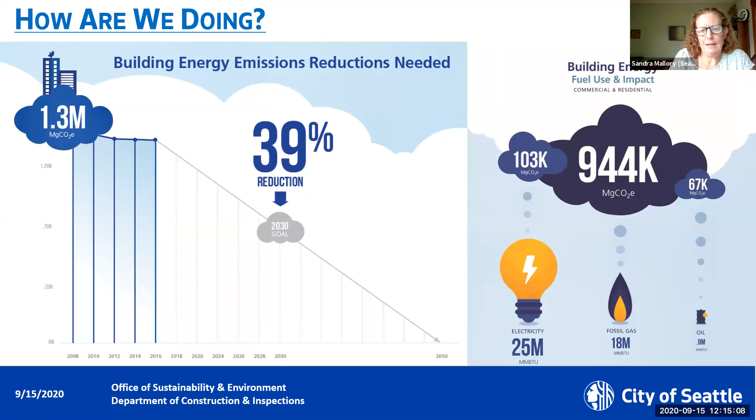I put this up here to highlight that policies are coming to address existing buildings, and so whatever you build now is going to have to accommodate that change. It's really important to think about how these buildings are going to act in the future. So I'll turn it over to Duane to tell you how to build them now so that you're set and ready.

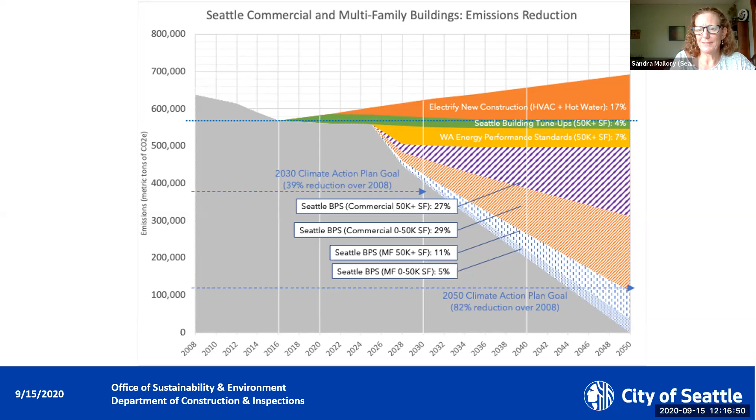All right, so here we go. In case you haven't met me, my job description is to try to move the energy efficiency and carbon emissions of buildings in the right direction, aggressively. This tends to make me rather unpopular, but I get to be the face of this.

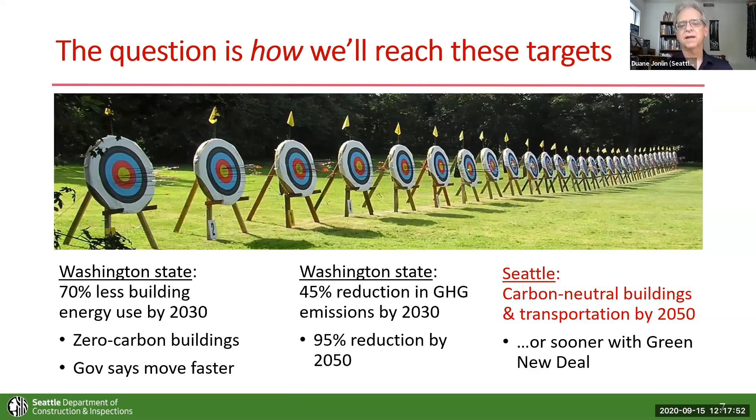We have set these goals at the state level in Seattle, and as you saw from Sandra's slides, more aggressive policies may be coming soon. Unlike most of the rest of the country, where they're always haggling about whether we should do any of this or not, we're haggling about: okay, we're doing this, what's the smartest and most sensible way to get there?

For this round of code changes for Seattle, we had 4 basic principles we were working from, that everything from now on should be built off of these 4. The first one, which you people are already really good at, is to do a really good envelope, because those are building energy savings that are real and very long lasting. Nobody's going to rebuild their building envelope as long as any of us on this call are alive, because we're doing a good job of it now and it would be really uneconomical. So we've got to build it very well—it's going to be there for a long time.

The second one is we can't be putting in fossil fuel equipment now and expect to be carbon neutral in 10 years or in 30 years. Once you put in a system, you've probably noticed that even as the equipment gets replaced, the system stays the same for a long time.

The third one is then: okay, if we stop putting gas appliances in buildings, we can't just do everything electric resistance, because we have a limited amount of clean electricity, and we're going to start using it to transform all the existing gas heating and water heating to electric, to heat pump, and our transportation as well. So we've got a lot of demands on our clean hydro and whatever renewables we can get.

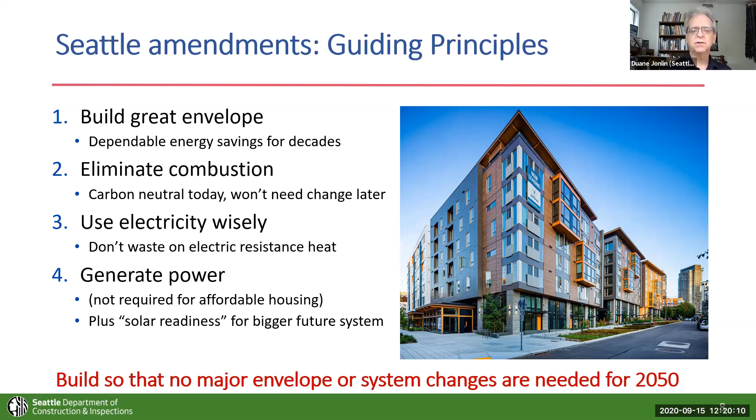But solar is something you could do later. It's almost the only thing you could do later without having to backtrack and rip stuff out.

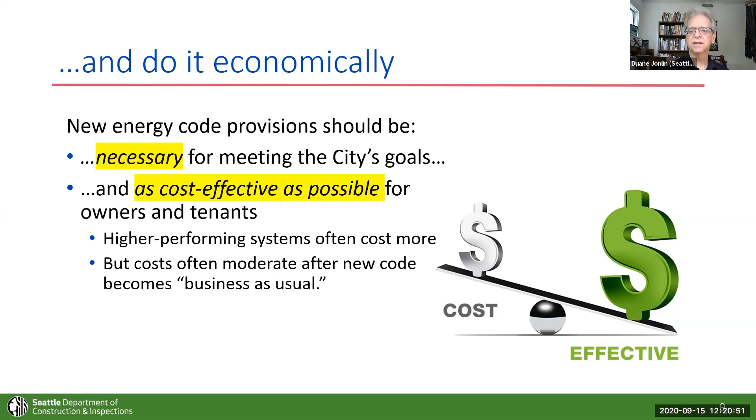Everything we're doing has to be necessary for getting to this target, and it has to be as cost effective as we can get. See the last bullet point there? What we've discovered through many code cycles is that things that are expensive while they're still only being used for LEED platinum projects or some other highfalutin thing, they're special order, one-off, high-risk things. Those cost more, but those costs come down once everybody's building to a different standard. We have lots of examples of that.

Finally, as a preliminary thing, we look to the big chunks of energy use. For residential, obviously space heating and water heating are the big chunks. So we can do stuff with some of the smaller chunks, but we want to keep our attention where we can make the most gains.

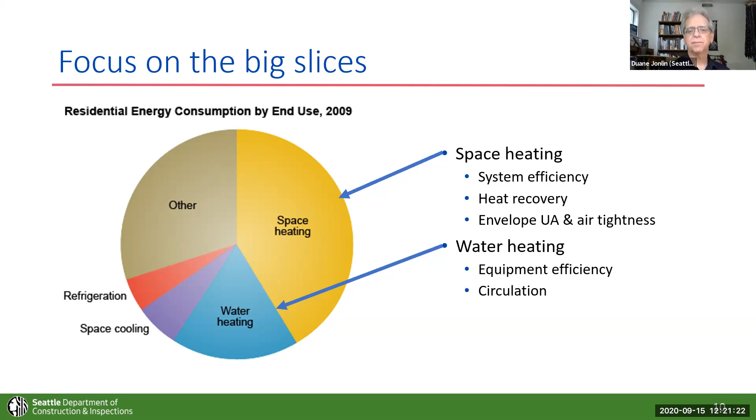So now I'll rattle through some things. I've tried to identify in the slides where things are statewide that are changing you might want to be aware of, and where it's Seattle specific.

The air barrier test rule up till now has been: you got to do the test, you got to report the results, but you don't actually have to pass. Well, now you got to pass. We've lowered the test standard down to 0.25 leakage, but the pass standard stays at 0.4.

The people that have hired envelope consultants never have a problem passing this test, but some of the other people, especially further away from King County, have had a rough time of it.

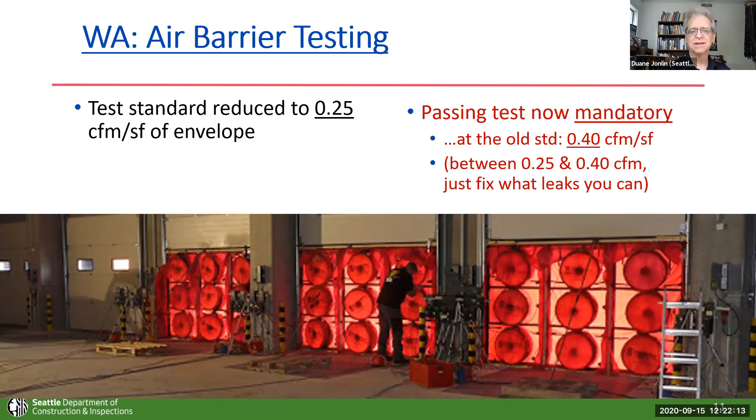Also, we've changed how much glass can go onto things. Once again, this is not a big deal for affordable housing, where you tend to have very reasonable levels of glass, but in the private sector, especially high-rise people, it's a really big deal.

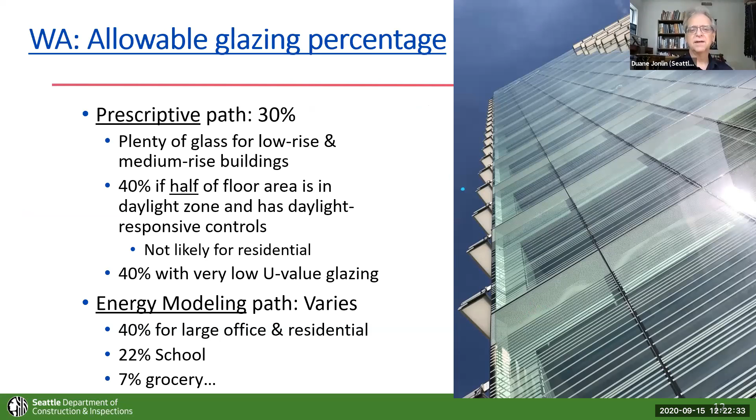Now, here's one where it's different. We've changed the way we're regulating glazing from our old system, which used to be metal versus non-metal. Now for all the punched openings, which is typically how affordable housing is built, not with curtain wall or other things, you see it in red at the bottom there. 0.26 is going to be our new standard.

That still allows for a number of products that are double glazed. We're not into the triple glazed category yet. And based on a phone call from somebody on this call who said, we really like operable windows in affordable housing, but you can't really do the 0.26, we have a slightly more relaxed standard for your operable sections.

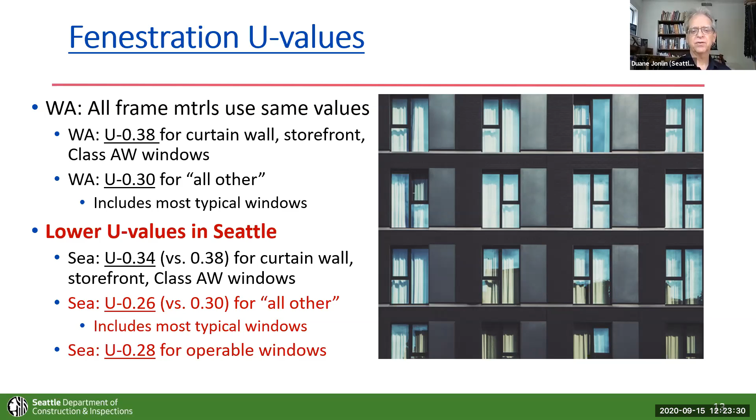By the way, having all this technical content to cover, I'm sort of rattling along like an auctioneer, but you can always stop me to back up and explain something, because if one of you has a question, probably everybody does.

We have some rules in that I won't go into too much depth on, but now you've got to pay attention to anybody that's got cantilevered concrete balconies. That's just been a huge heat leak, and so we have some control over it now.

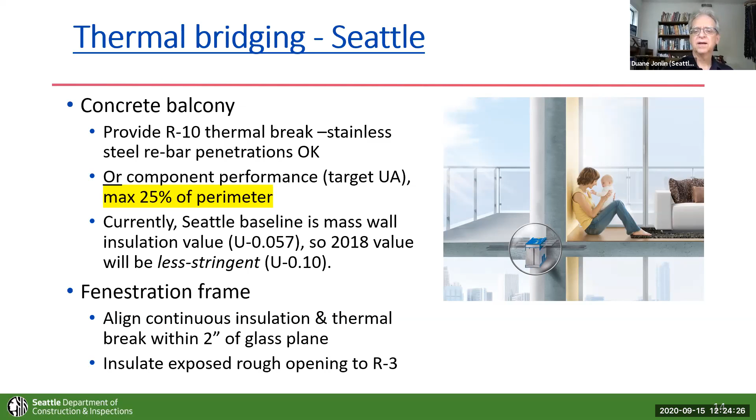Also, a problem that's not typically an issue with affordable housing: your glass has to line up with your insulation, or be close to it, so that we don't have a big thermal leak around the perimeter there.

Here's something that's just Seattle, and I brought this over from the New York City Code. PTACs and PTHPs have been used for budget motels for a long time because they're real cheap, and to service them you can just yank out the entire unit and push in a new one.

But at least now we're going to insist that people recognize that, as opposed to the standard for a typical wall assembly, which has a U value of 0.05 something, this is 10 times that amount of heat loss, and you'll have to calculate that into your wall assembly U values if you're going to go for these things, because they're about 4 or 5 square feet.

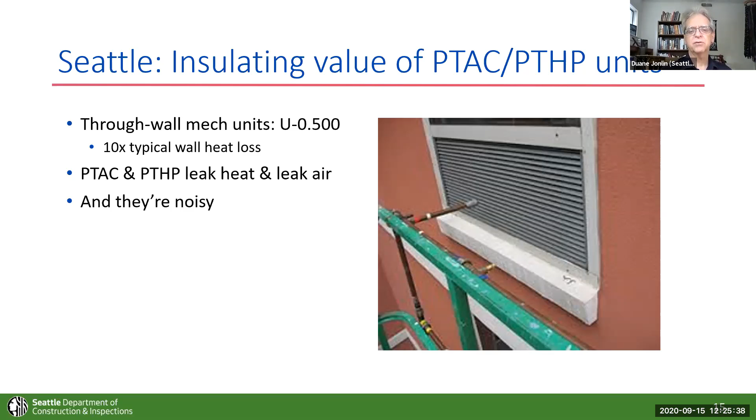Yeah, about 5 square feet of this very, very poorly insulated thing and a lot of air leakage. And they make so much racket. Not sure if anybody has been using them, but we'll make those go away.

Here's something happening at the state level: the state is requiring this total system performance ratio, which is just a backstop measure that ensures the HVAC system you're using has about the same level of efficiency on an annual basis as what's been selected as a pretty good system for that building type.

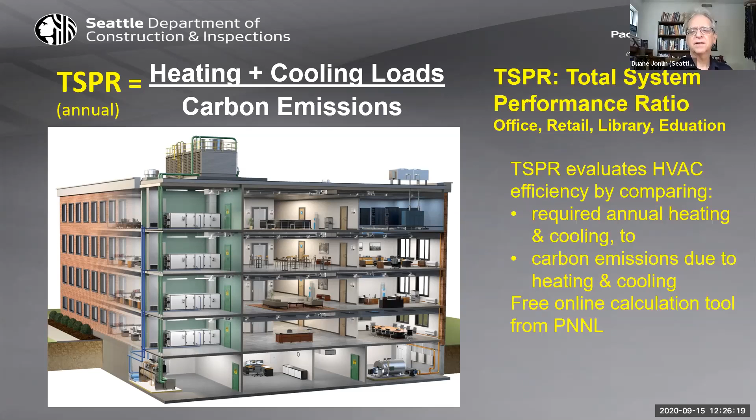You see on the top right there that it's office, retail, library, etc. In Seattle, we've added multifamily, and this TSPR - we could have a whole separate session on this sometime, and I can actually get the authors of this in the virtual room with us. There is free software available online at PNNL that they've developed for this, with funding from NEEA and Seattle City Light, and I think OSE contributed too, so we got a module for multifamily as well.

So we have a standard for efficiency of heating. Once again, this probably isn't going to change any of your design. It probably will impact high-rise market rate housing a lot.

Just be aware that this is there, and anybody who would like to fool around with this software - they've just completed and posted online the multifamily part of it. Contact me directly and I can get you that link. They would love to have some of you run through this and give them feedback on anything they could do to make it more user-friendly.

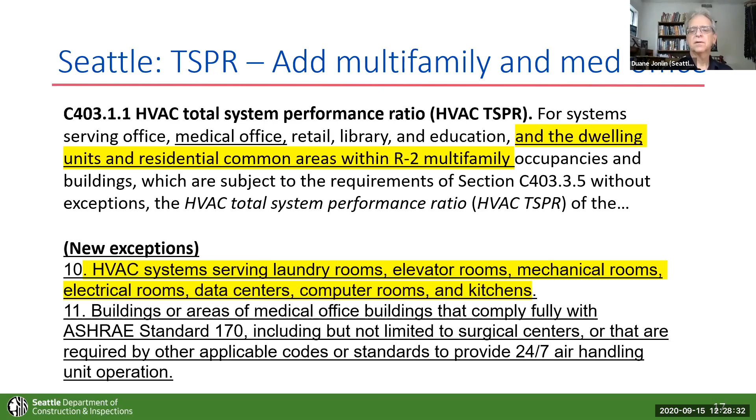So this is something that's not Seattle - it's Washington State, and you've probably all been hearing about it already. I just wanted to make sure we got a slide up to recognize that just doing trickle vents and bathroom exhaust - a lot of studies showed that it really wasn't ventilating dwelling units well at all, especially the upper floor units. The trickle vents often ended up being used to flow air out that had come in from the corridors.

In this case, you've got to deliver ventilation air to each space, and it's got to have heat recovery from that air.

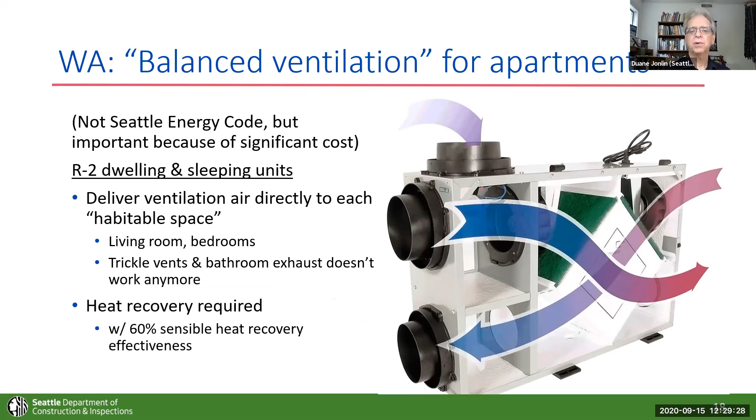Talking to various engineers in town here, you could use those little units like you see on that slide for each apartment - some people are going to do that. You could have rooftop units with shafts down to each unit. Remember the quantity of air is not very large, so these are small shafts. But with the vertical approach, you end up with some fire damper issues and having to have a shaft that takes up area you'd like to use for your tenants.

My favorite looks like it's going to be doing floor-by-floor units - maybe at each end of the corridor you can have a unit, and some people like to run it right above the line of bathrooms rather than down the corridor and through those fire rated walls. But there are several ways to do that, and everything we're doing now should take into account that this is now required.

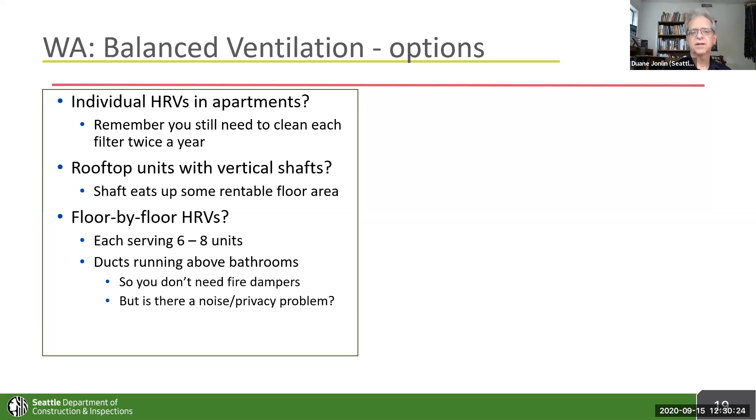So for Seattle, there are 3 big deals that I'm going to mention here, and this is big deal number 1: you've got to not use electric resistance or fossil fuel for space heating. So that means heat pump systems.

And then I've got some exceptions, because it doesn't make sense to use a heat pump for a really, really low load. So I started out with 250 watts, then went up to 500 watts per apartment, then went to 500 watts per room, and then got nudged by another person on this call who said if you could go from 500 up to 600, I could do my corner units as well under that limit. I said okay, 600 sounds good.

It may turn out that with larger units, especially say the one that's on the top floor in the corner with roof exposure and 2 exterior walls, you need to go with a heat pump for that, but it would be a limited number of those apartments.

The rules do allow that when it gets down to really cold temperature, and based on the type of system you're installing, it's either 40 degrees or 32 degrees, you can start having electric resistance heat kick in. But it's not the kind where it just suddenly switches over entirely to auxiliary like a lot of PTACs do - instead it just phases the extra heat in as you need more of it. We don't get very many cold days, but we want to make sure everybody stays warm on those extremely cold days when they do happen.

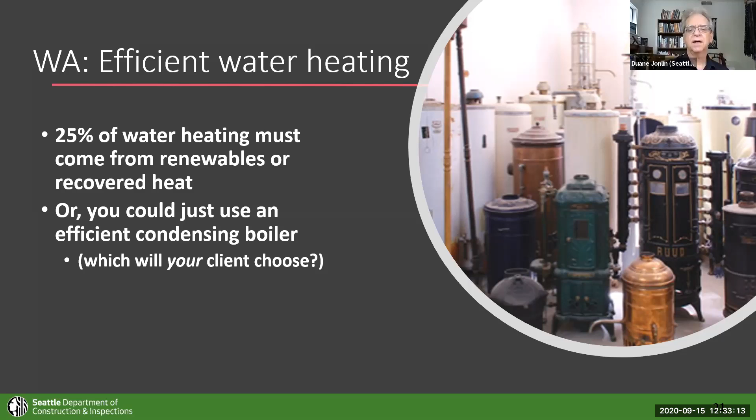Inside of Seattle, and this is big deal number 2, central water heating systems starting at the beginning of 2022 - so you got an extra year to get ready for this - that ends up being heat pump system with substantial storage tank, because the heat pump doesn't heat the water as quickly as gas or electric resistance boilers do.

So it's a challenge going forward, and various people have stepped up to say they're going to help. NEEA is planning on providing technical assistance and guidance there, and they have a whole high performance heating section that they've been working on, that they're going to get into these multifamily units, and City Light's probably going to be offering training and support as well.

So from now, we got like 16 months until we got to be ready to at least have designs that are ready for that. And then a few years from now, as we start installing these systems, we'll have to have all the plumbers and installers up to snuff. So this is big deal number 2.

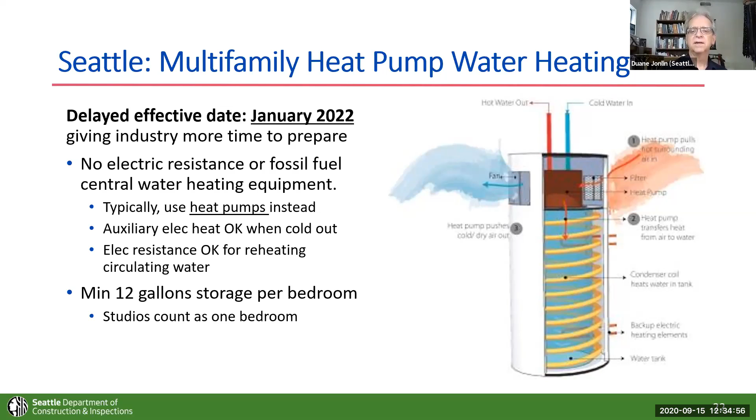And remember, this is all for things that are 4 stories and taller, but in Seattle proper, that's pretty much everything now. You would have to separately meter your gas, same as you do for hot water and for electricity, for each unit - you have a separate gas meter. There are little ones that fit in a wall for 3/4 inch piping, but that could be used for billing purposes or not. It would be up to the organization that owned it.

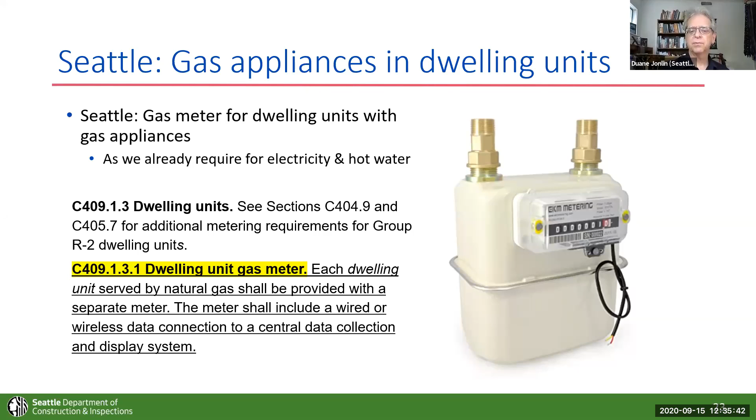Lighting power allowance is not an issue for dwelling units, because they have their own separate rule. But for all those other spaces you have in your building, at the state level, lighting levels have come down 11%, and that brings it down to just about exactly where Seattle's current lighting power allowance is, and then Seattle's going 10% lower than that.

Talking with our electrical people that do plan review, this is never a problem - it's really easy to meet these targets, but we want to make sure that the targets are something like realistic.

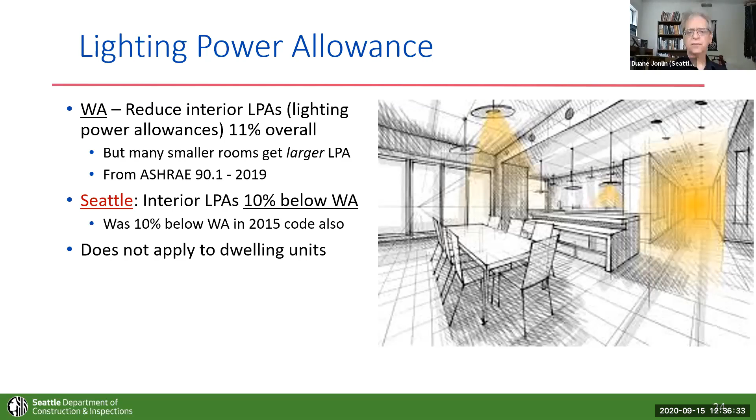So here's - I somehow lost my slide. Let's look at C406. This is the section that says a building has to have a few above-code measures built into it, and at the state level, you have to get 6 points on this scorecard, and in Seattle you'll have to get 8.

I had initially proposed 10, but I kind of got talked back off that ledge, and so we've done a couple of changes to that, Seattle.

Remember, we just had a slide a minute ago that said you've got to use high efficiency water heating - so that's already in the code baseline. So that number 8 goes away in 2022 as an option.

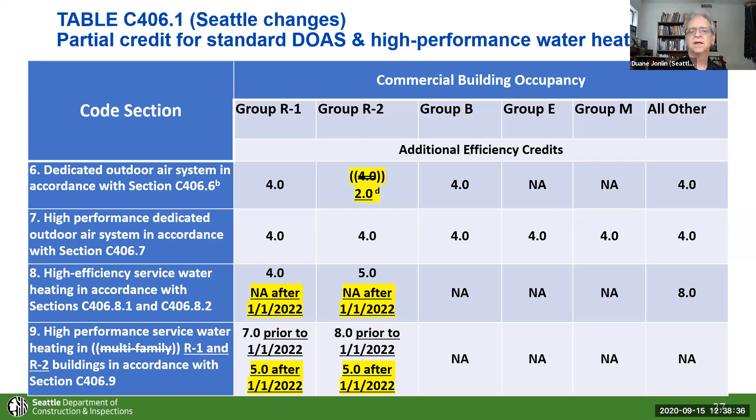Here's an engineer looked at the state code - this is a friend of mine from FSI Engineers - and sort of marked out which of the options made the most economic sense in his view for the different building types.

So you see the 2 columns that I have circled in red there. That's your R2 multifamily. The squares filled in with green are the ones he felt were a slam dunk, that you got a lot for your money. The ones filled in with orange are sort of second best - they also penciled out, but just not as well as the ones in green. Then there are a few he didn't color at all, meaning that'd be really expensive.

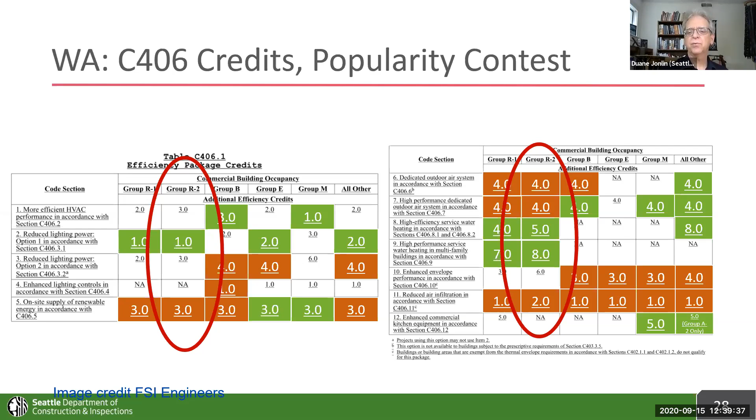Somebody's taking a look at this - your mileage may vary - and you notice on the chart on the right that 8-credit thing has become 5 credits in the new table. So just taking a shot at it based on his ratings, say you take the lighting one, that's almost a gimme, and the advanced water heater, that gets you up to 6 credits. To get to Seattle's 8 credits, do the reduced air leakage, but you might pick one of those other items in the second best column. Notice the rooftop solar one is 3 credits maximum, but you can get that one credit at a time, so you could just do 2 credits that way.

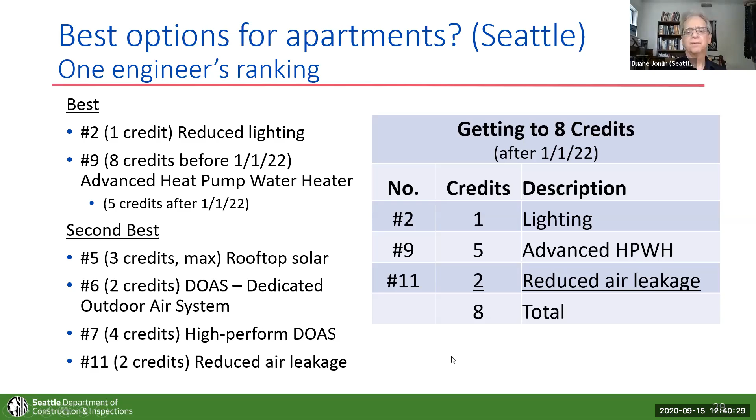So I'm going to talk about energy modeling for a bit. I'm not sure - maybe somebody on the call could unmute for a second and tell me, how common is it for affordable housing projects to do energy models for their projects? Can somebody fill me in there?

Maybe not. David, do you want to weigh in on this? I've not been involved in one, but we're starting to look at it more to provide more design flexibility. I don't know, I haven't looked at it under the 2018 code at all.

Yes, we typically see energy modeling used for all the high-rise projects in town and for complicated buildings like labs and hospitals, but more basic buildings don't use it. But we'll run through this anyway, because it's probably at least important for you to understand that we've entirely thrown out the energy modeling pathway we've used for all these years and replaced it with a new one.

It's from ASHRAE, with the poetic title of Appendix G. And we've switched from measuring the energy used on the site to measuring the carbon emissions.

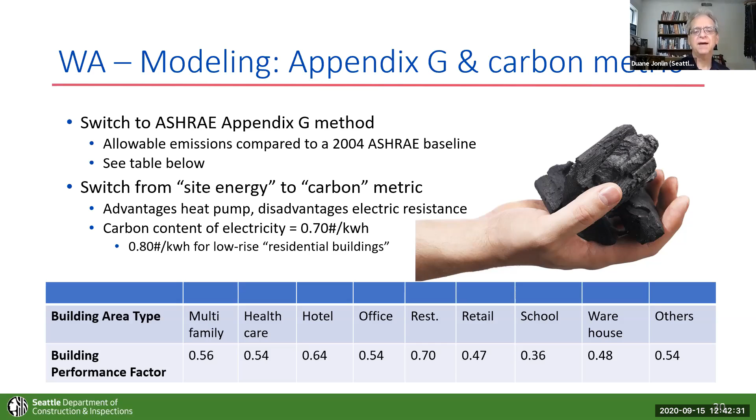So what you see there is at the state code, if you look at the row of numbers on the bottom, that's the percentage of a baseline that was, for odd reasons, tagged to the 2004 version of ASHRAE 90.1. So if you look on the left where the multifamily is, you can have 56% as much emissions as you would under that old code. Now in Seattle, because of all these other things I've told you, we have a more stringent code.

So to make the Seattle energy modeling match the prescriptive path stringency, we just took 10% off of each one of those. It's not exact, but it's pretty close to the difference overall. So for multifamily, instead of 56% as much carbon emissions as that old ASHRAE, you could use 50.

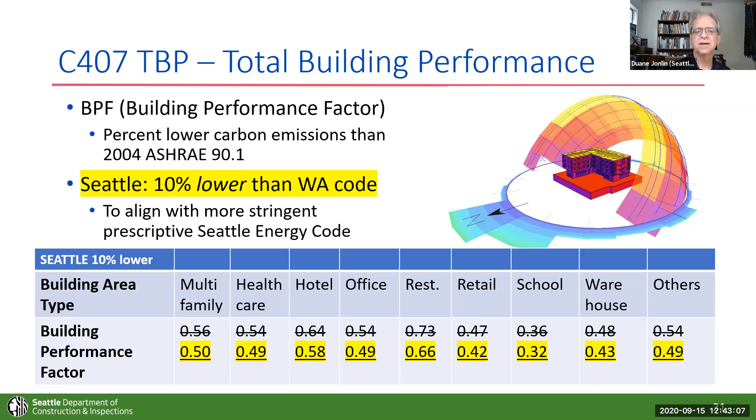And then we also have this target performance path, which I don't think any of you has ever used, but there's another option - if you want your building evaluated by how much energy it really uses and be willing to put some money there to guarantee that, you can have 12% higher than Seattle would normally allow.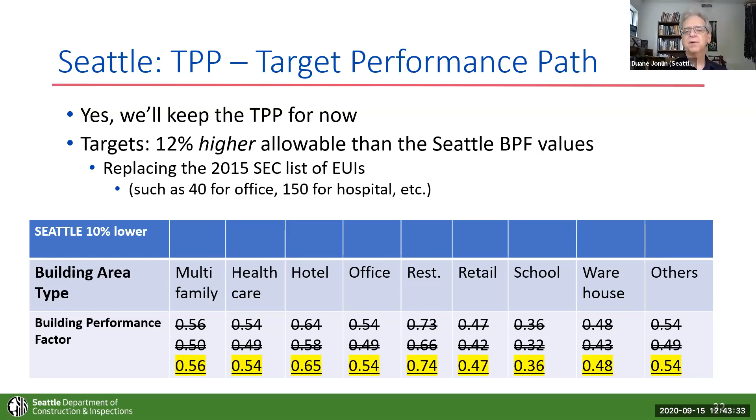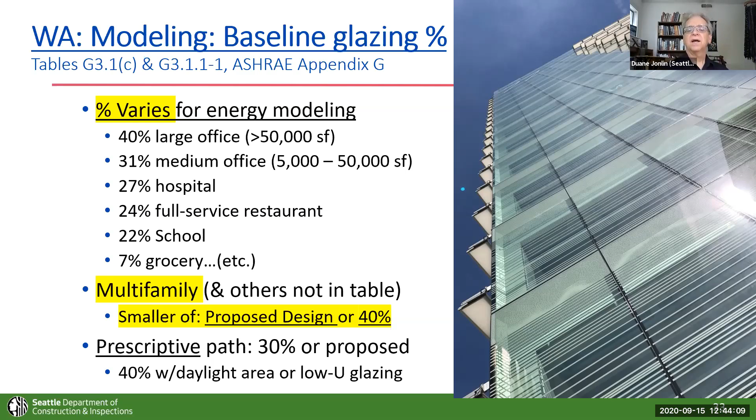This is big deal number 3 for anybody who uses energy modeling. Since energy modeling has typically been used to degrade the building envelope, I've been saying now that in this proposed new Seattle code, you can't make the building envelope any worse than the prescriptive code allows by doing energy modeling. You've got to at least keep that, because remember at the very top of this presentation, idea number 1 was that we've got to build envelopes that will stand the test of time and get us where we need to be in 2050.

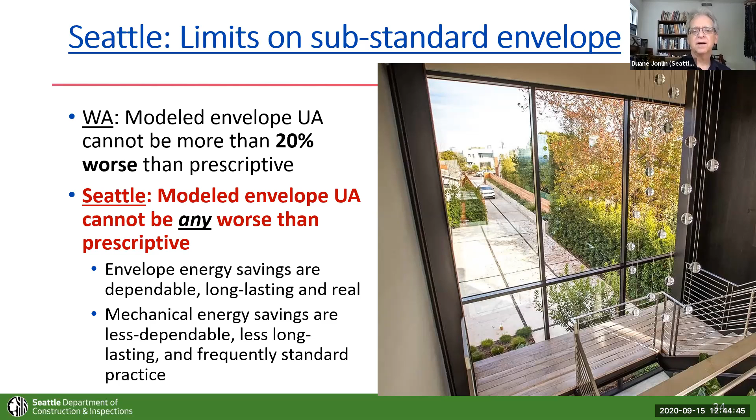There's a larger requirement now for buildings, including multifamily, to do this, but I've exempted affordable housing units and affordable housing projects from the renewables requirement. For those in market rate housing or other commercial buildings that are required to do this renewable energy, I've set up options where they can donate or gift a system over to an affordable housing project in Seattle or to a state agency that has a solar program set up.

Thus they can get out of having to do it, or part of it, on their own roof. So you might have somebody calling you up and saying, hey, do you want a free PV system on your roof? And I think the answer is yes, we want the free PV system. The way I've set it up in the rule for that gifting is that it would have to be complete and functioning on the site that they sent it to in order to get this credit.

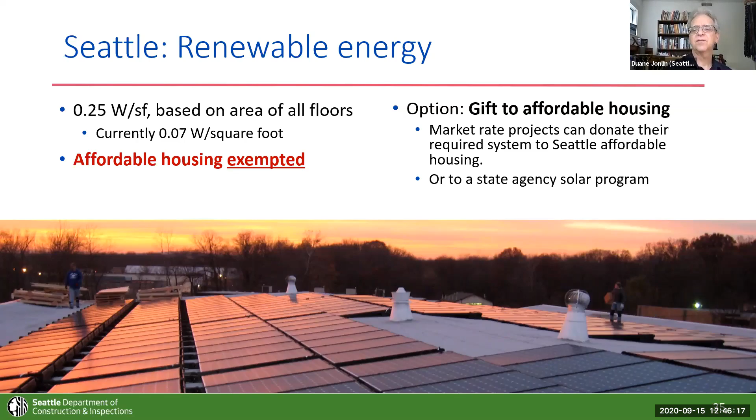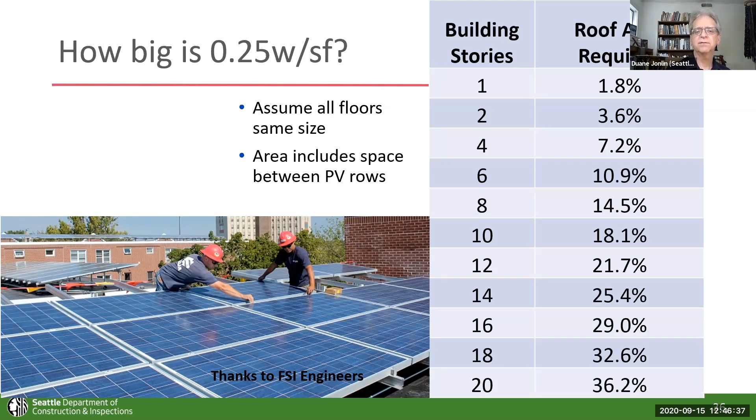So that's it. I know that a lot of this sounds challenging, but I wanted to end by saying that we have buildings up around town that already meet these requirements and exceed them. They're doing better than that, for reasons of their own, at market rate and in affordable housing have gone beyond. And you in the exemplary buildings program are familiar with this fact.

Yes, it is possible already, and we can get there, and you'll be leading the way for a lot of other people that are looking to you, because you and the Exemplary Buildings program have already solved a lot of these problems. You've looked at envelope. I know we're going to be looking at water heating coming up, and you've looked at mechanical systems. So if anybody's on top of it, it's probably the people on this call.

And with that, I'll turn it over to Marty. You want to be the MC here?

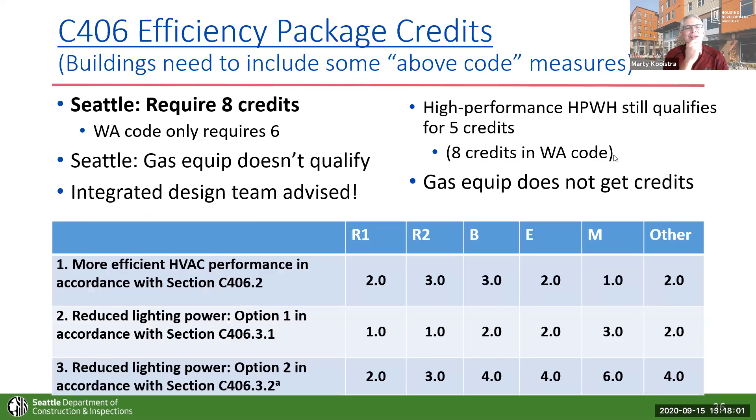cost benefit calcs and getting those conversations moved earlier in projects. Can I make a quick request, Duane, if you could please pull the presentation back to the slide on space heating? I kind of missed half of the information on that as we were running through, and it would be nice to review while we're having this conversation. Thank you, I'm glad Aaron caught that. He kind of slid that slide through fairly subtly.

So just to recap, the deal is that the fundamental space heating system cannot be electric resistance or gas, but there's the exception for 600 watts per room. Talking with several different affordable housing providers now, 600 watts per room works great for most rooms. There's some question, works great for a corner unit or can't possibly work for a corner unit, from different people who are both really good. So I think careful attention to air leakage might be one of the clues that lets you get under that limit.

If it is indeed over that limit, like we mentioned about the upcoming potential higher temperatures in Seattle in the summer, having those more exposed units have some cooling capacity might actually be something you want to do anyway, which you get with most heat pump systems.